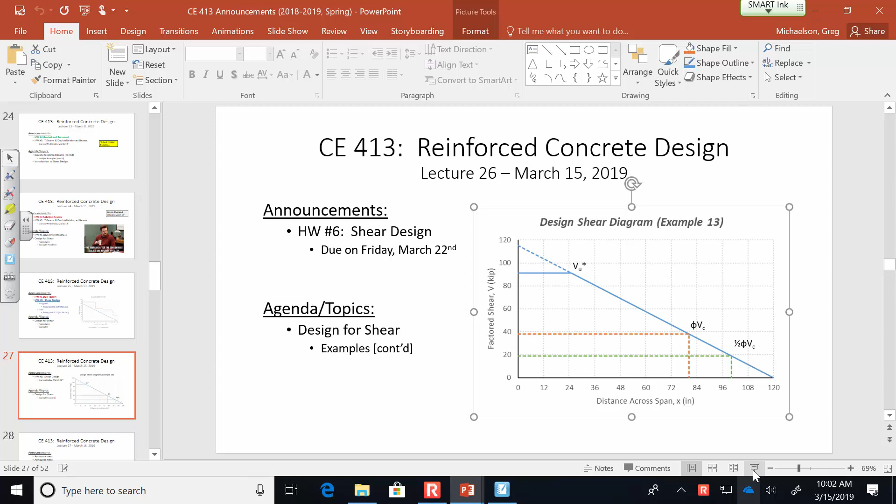Oh, goodness. All right, let's get started. So I don't really have a whole lot in the way of major announcements.

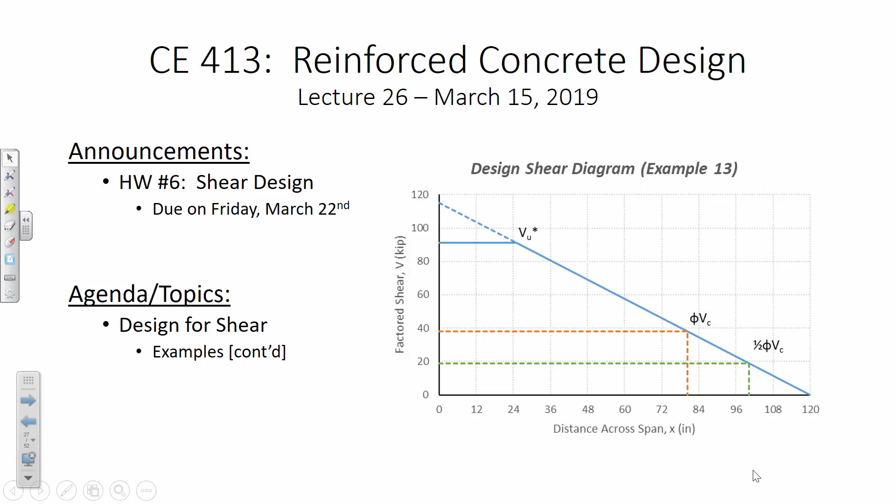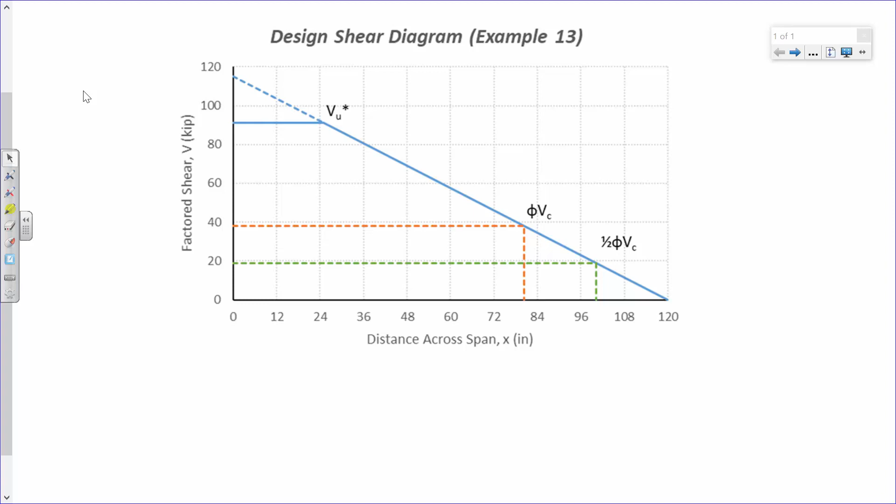Now what we had arranged, or what we had come up with, was a few other things. Let me write those out. So here's the image, I'm going to drag this over, and then there were a few other things we should add on top of this.

First off, we know that phi VC was something like 37.95 kips, I think that was one of our values. And then we had 2 equations that we had come up with. Our shear equation was 115 kips minus 11.5 kips per foot times x. And then we came up with x equals 115 kips minus VU, over 11.5 kips per foot. Those were the 2 expressions we came up with for this problem.

The first is given an x value, what is the value on the shear diagram? And the other is vice versa: given a shear value, what is the location on the x diagram?

Okay, and then we've got our VU star. VU star, let me point that value out. This was 91.04 kips. This is 37.95, and this is 18.97. This x value was 80.4 inches, this was 100.2. So is everybody okay with determining that?

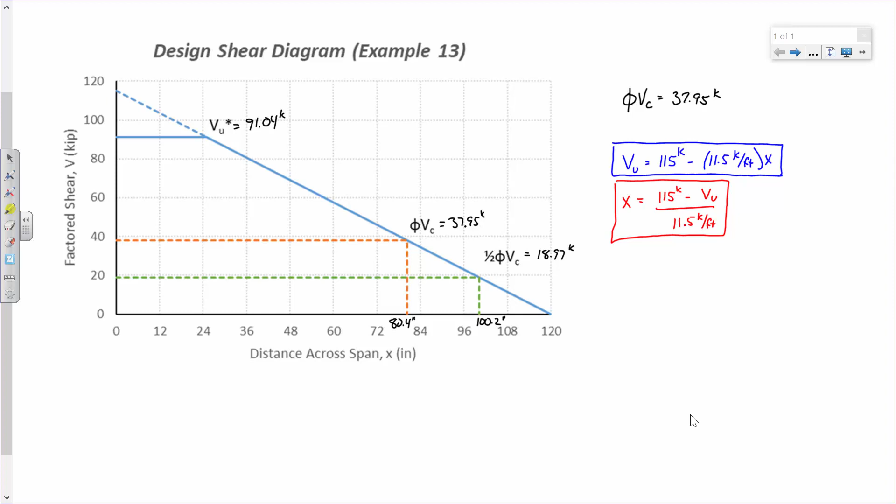Okay, all right, so let's begin our design. Let's actually get into this, because the design process is not that difficult once you have the shear diagram figured out, but laying it out takes a little bit of thought.

The big thing that we ended with in this example is one thing I need to state: we are going to be placing stirrups from x equals 0 inches to x equals 100.2 inches. That was the final observation we made. Remember, from x equals 0 to x equals 80.4 is where we have to have them for strength requirements. Between 80.4 and 100.2 is where the concrete takes over, but we just have to place S max. Anything past that is where we don't need stirrups at all.

Sound good? Now, to start my design, what I'm going to do is use VU star. Based on VU star and based on what we're getting out of our concrete, we're going to determine what our required stirrup spacing would be at the very beginning. So step 2 is to determine our starting S value.

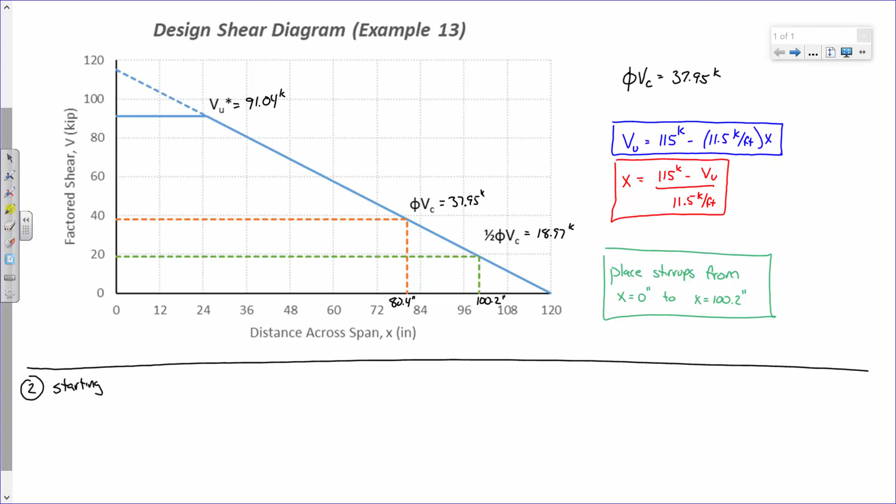Okay, so our starting S value is computed by saying phi times AV FYTD over VU star minus phi VC. Everybody's going to write that down, and I want to explain why we're using this expression the way that we're using it. So go ahead and write that down, and I will explain what's going on.

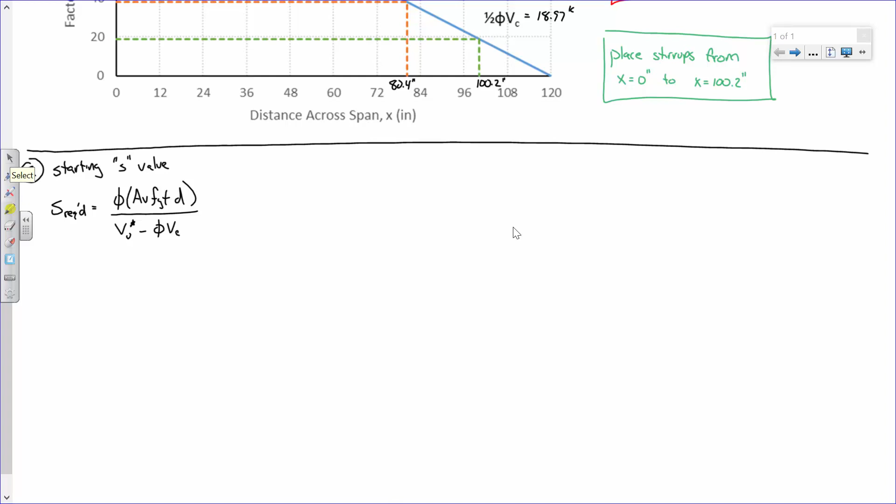Everybody good? Okay, so what I'm doing here is I'm basically looking at this: I have phi Vn has to be greater than or equal to Vu, and so we compute phi Vn by adding up phi Vc and phi Vs. I know what phi Vc is, that's 37.95 kips or what have you, and so I need to figure out what phi Vs is. Well, phi Vs is phi times this quantity, it's AV Fy d over S. So really what I'm after is I'm solving for S — what stirrup spacing do I need to provide in order to ensure that my beam has adequate capacity?

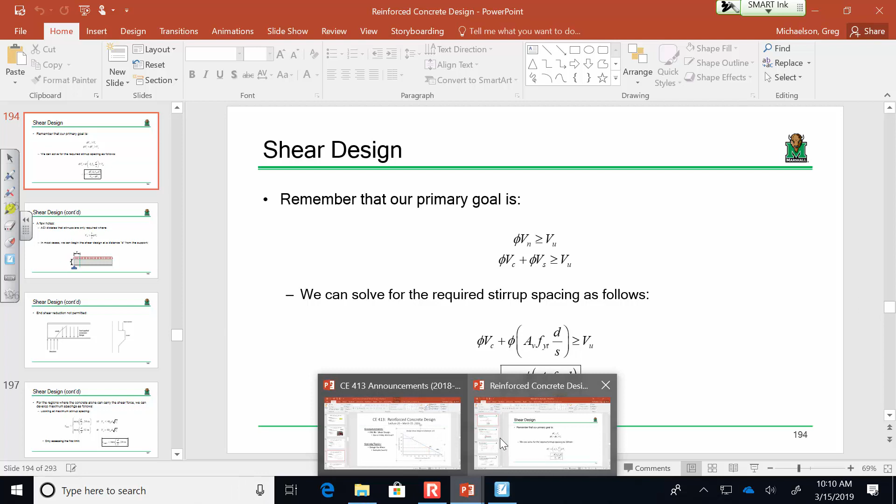Now, what I'm going to do for the purposes of this design is I'm going to start my shear design using the shear at x equals d. So I'm starting this design at VU star, that's why we have VU star there. And so that equation is exactly what it was before, just plugging in VU star. So let's plug and chug this out.

So this is a big fraction up top: 0.75, 0.22 inches squared, 60 KSI. What was D for this problem? 25 inches. And then VU star — I'm not using the shear at the support, I'm using the shear D away from the support. So I'm using 91.04 kips, and I'm subtracting phi VC, and phi VC was 38.97 kips.

Did I do something wrong? 37.95 — why did I think 38.97? I don't know where I got that. It's 37.95 kips. Okay, so what does this come out to be?

4.66 inches. Do I have a second on that? So what this is saying is that if I want to provide adequate shear capacity in this region right here, and we're assuming constant shear, I need to utilize a stirrup spacing of 4.66 inches, right?

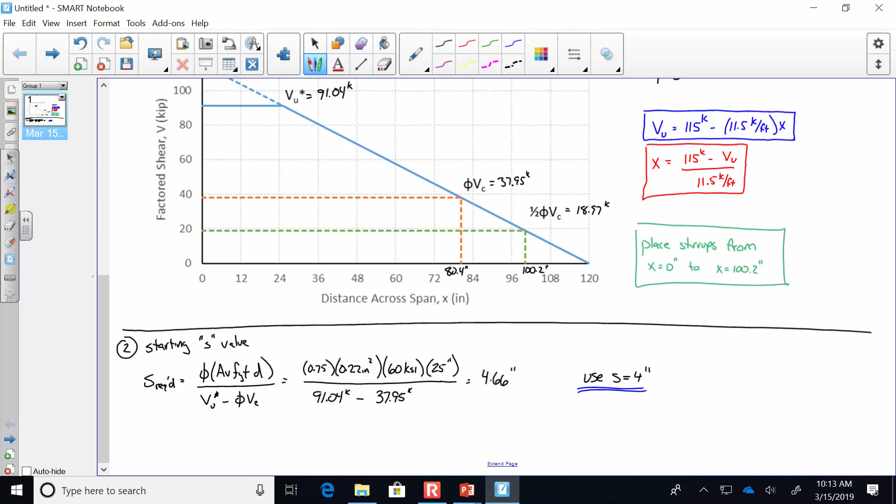Now, let me explain how this layout will work. What I'm going to do is I'm going to generate a design, okay? We could stop right now and produce a design, and I'm going to show you how to do that right now. We're going to produce a design, and then we're going to improve upon it, okay? So let's look at design number 1.

Okay, now let me explain how stirrup spacing works. So we're going to use a stirrup spacing of S equals 4 inches throughout the beam. However, when you place your first stirrup, typically what you try and do — a very common value for your first stirrup is to either use half that value or to use something like 2 inches. I'll show you why here in a second.

So I'm going to write out verbally what we're going to do. We're going to place the first stirrup at X equals 2 inches, okay? Then what we're going to do is we're going to use 4-inch spacing.

Until where? Now I'm keeping this design very, very simple, really easy. So I'm going to use 4-inch spacing until X equals 100.2 inches. Why am I stopping it at 100.2 inches? Because past 100.2 inches, the concrete can take over and I don't need stirrups at all. Does that make sense?

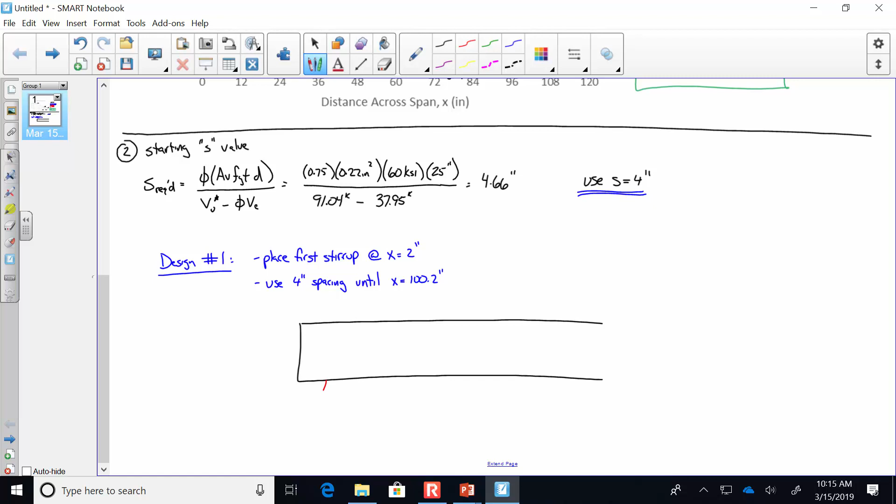So imagine, here's the beam, and let's say that the support is right here, okay? So here, that's X equals 0, right?

Typically the idea is we'll place that first stirrup 2 inches away and then 4, 4, 4, because you could theoretically have a stirrup behind there, and so you would know that that stirrup spacing crossed or straddled the support, which is why we go with usually half or 2 inches or something like that. It's very common. Is everybody okay with that?

Okay, so here's what we're going to do. We're going to place our first stirrup at X equals 2 inches, so 2 inches away. Then we're going to have a stirrup 4 inches away, 4 inches away, 4 inches away, etc.

Okay, let me lay that out. I'm going to have one stirrup spaced at 2 inches, so that's going to be 2 inches out. Then I'm going to do my remaining stirrup spacing at 4 inches. How many increments am I going to need to get to this? Think about how that math works.

So if I do 1 at 2 inches, that's 2. Then this would be 6, this would be 10, this would be 14. Everybody see how this is going? What did somebody say?

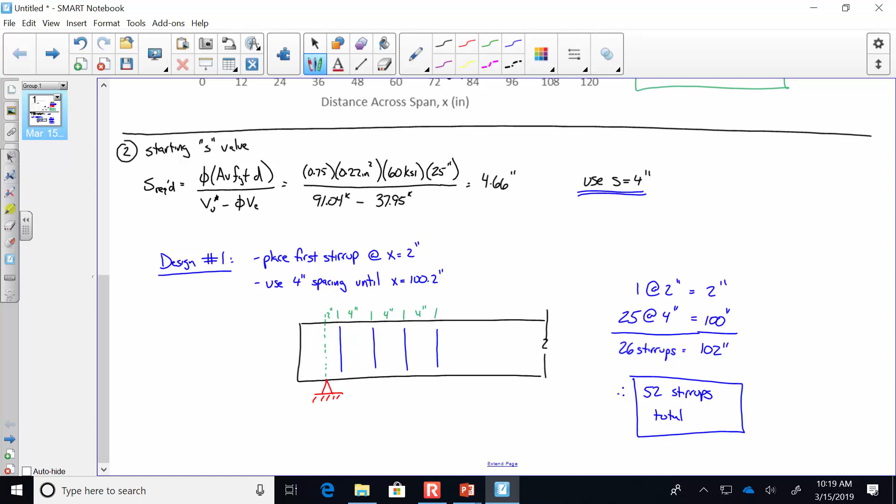Okay, now that was us crawling. Now let's try walking, okay? And what do I mean by walking? I'm using baby terminology, you probably see why. What do we need to do now? What was a point somebody raised earlier?

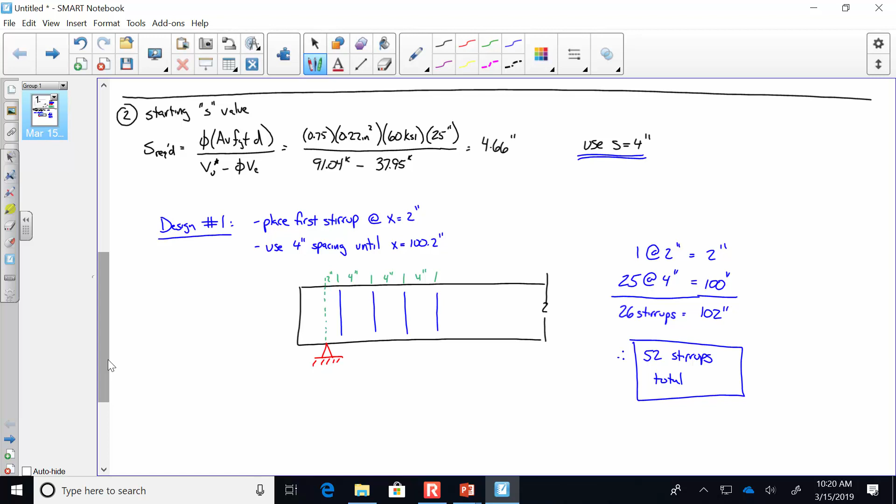Well, that's true, but what about that center section? That center section, we could use S max, right? Okay, so before we do that, I have a little bit more of an elegant way of handling that. The first thing we probably need to do is figure out what S max is. Let's go off on the side here, and let's determine S max.

Okay, let's determine S max. The way we do that is we have two different quantities that we're going to compute. Before I do that...

Off to the side here, what is 0.75 times the square root of FC prime? You'll see why I'm doing this. Just bear with me. Okay, I'll just put that off to the side for now.

So we have S max 1, which is the minimum of D over 2, or 24 inches. So that's the minimum of, what is D? 25. 25 over 2, or 24 inches. What is 25 over 2? 12 and a half.

That's S max 1. So there are two S max computations that we perform: one because the code has a limit on maximum spacing, and the other because the code has a limit on minimum reinforcement. We just rearrange it and solve for S.

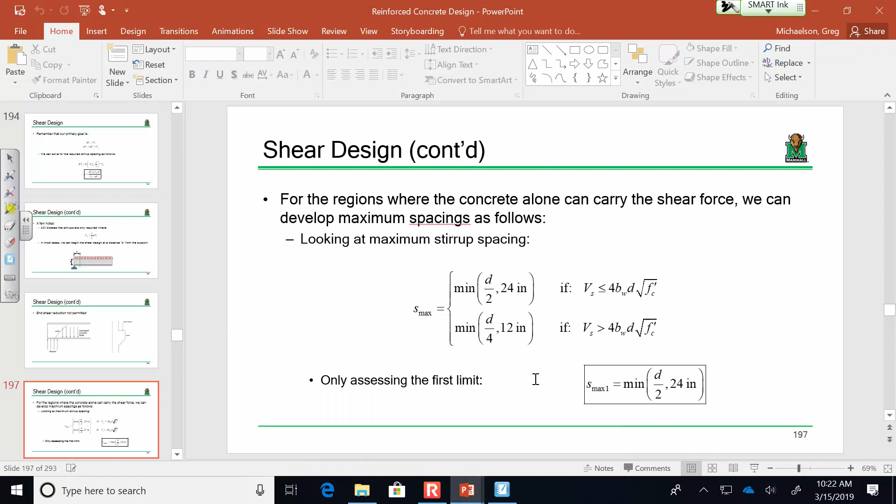Now S max 2 is computed by taking AV times FYT over BW times, well, if you go to the spec, it's BW times the maximum of either 0.75 root FC prime or 50 PSI. So which is the maximum? 50. So you see why I computed this off to the side, because we were going to need it anyway.

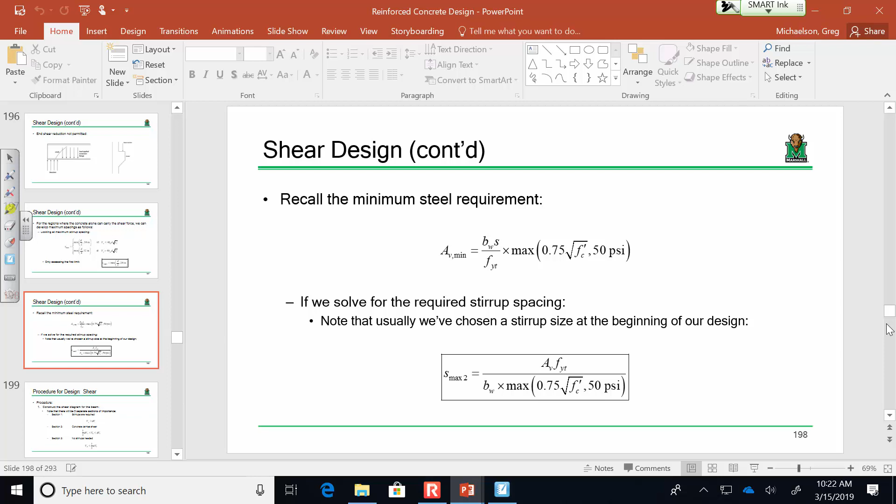So the formula is the maximum of 0.75 root FC prime or 50 PSI. Well, we know that's 50 because we computed that over here. So we have 0.22, 60...

BW, what's the width of this beam? I don't remember, was it 14 inches? 16 inches. And then this is 50 PSI.

Do we have a problem here? There we go, making sure everybody's awake on this Friday. Got to turn that into 60,000. How, was it like, oh I forgot about that? You're like, Dr. Mike, it's Friday, let's just go, we can't handle the jokes. Just wait till senior design. All right, so what does this come out to be? Come on, it's concrete design, I'm trying to crack you up. Come on. That was a good one. What's that? What'd you get? Have I not used that one yet? Concrete design, I'm trying to crack you up.

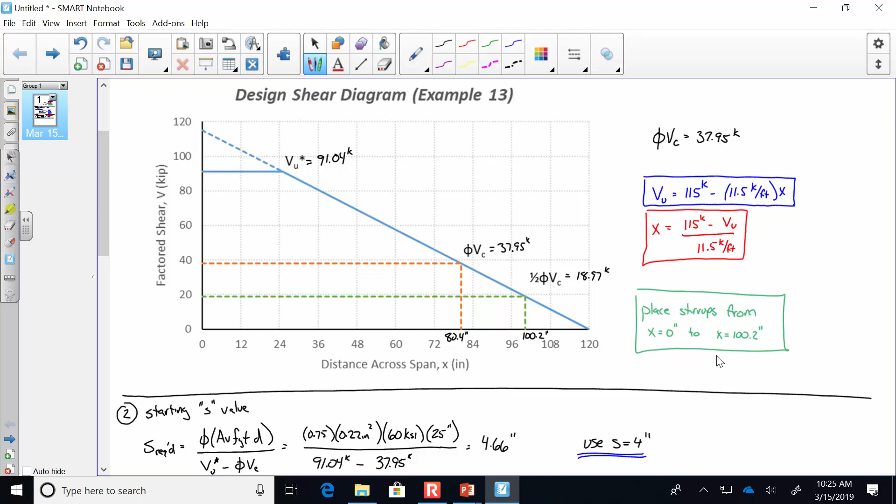If I have an S equals 12 inches, I can compute a VS, a VN, a phi VN. I can compute the capacity, and then I can figure out where that capacity occurs on the shear diagram, and it'll tell me when I can start using S equals 12 inches. So that's what I'm going to do. So step 4 is determine when we can start using that.

So determine the range for S equals 12 inches. Okay, so here's how that works. So VS is AV, FYT, D over S, so that's 0.22, 60, 25 over 12. What does that come out to be?

27.5 kips. Second on that? Okay, next, what I'm going to do is compute phi VN. So phi VN is going to be phi VC plus phi VS. So what's phi VC?

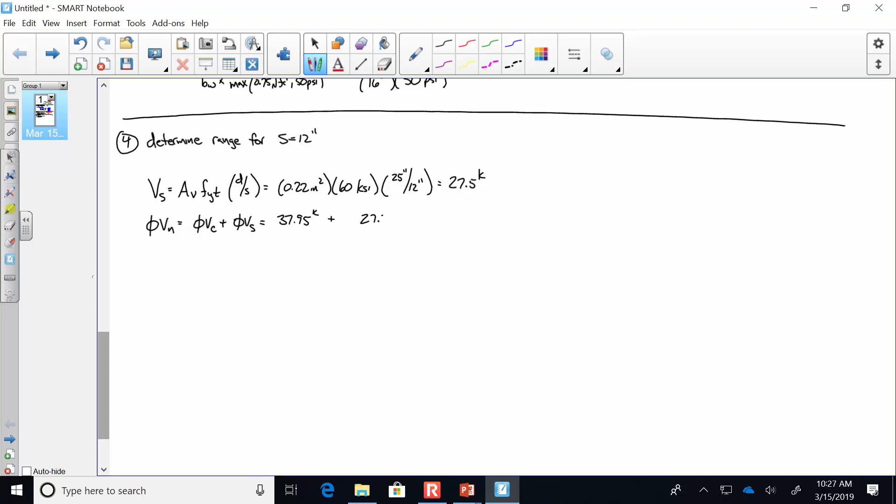37.95 kips, plus, you do not just add 27.5, that's wrong. You add 27.5 times 0.75, so don't forget the phi here. Make sure you're adding up apples to apples, so you have a phi VC and a phi VS incorporated. So what does this come out to be?

58.58. Okay, all right. Let me scroll back up to the shear diagram because I really want this to make sense. What'd you say? 58.58. So that's about right there. Would you agree with that?

Would you agree that I can probably start using S equals 12 inches about there? Think how this works. If I use S equals 12 inches, I get a capacity of 58.58 kips. So instead of starting to use S equals 12 right here, I'm going to start to use it right here. So I'll use 4-inch spacing up until here, 12-inch spacing up until here, and then I'm good.

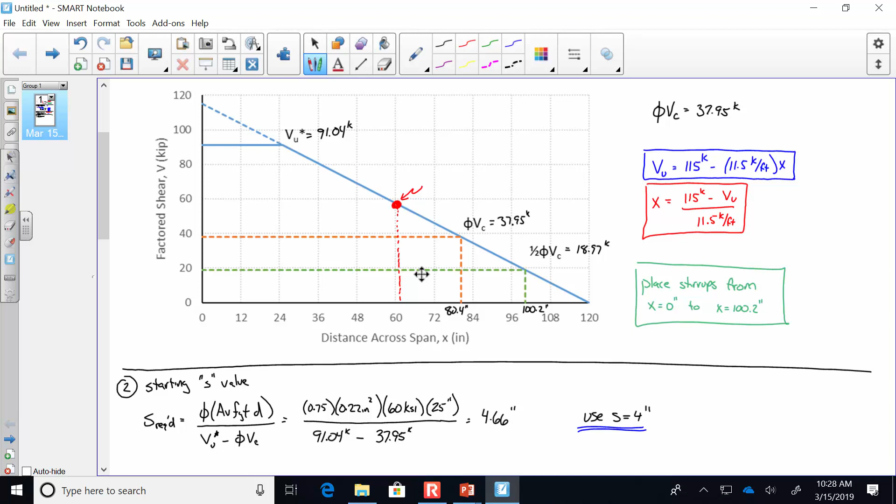Now, how do I determine exactly where that is? I use that equation, and for this VU, what do I plug in? The 58.58 kips. So let's see what that is. X at phi VN is 115 kips minus phi VN over 11.5 kips per foot. So that's 115 kips minus 58.58 over 11.5 kips per foot. And so what does that come out to be?

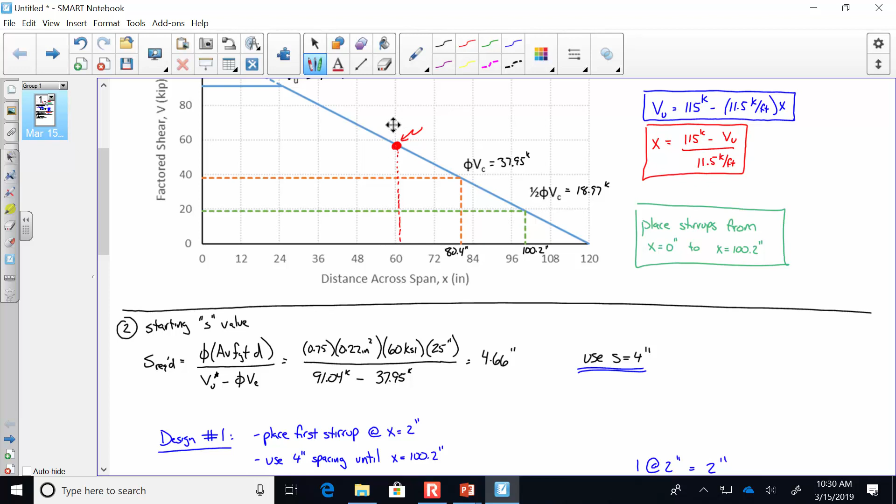.91 what? Feet. So in inches, that's what? .87 inches. So was that about 59 inches? What did I draw on the graph? A little over 60. Well, I'm not really good at drawing a straight line, but it's about that spot, right? So I drew that down to like 60 when actually it's probably a little over there. I can't draw, so... but I can make stupid puns.

Okay, so here's what this means. Let's try this again. So now this is going to be design number 2. Now let's write it out verbally so that we understand what we're doing, and let's see if we can do some mental math to try and figure this out. So what we're going to do is we're going to place our first stirrup at X equals 2 inches, right?

Now, right now we have 4 inches, and what else? We have 4 inches and 12 inches, right? So here's what I propose. We're going to use 4-inch spacing until where? When are we going to stop using 4-inch spacing? There you go, the X equals 58.87 inches. And then once we hit that point, then we're going to use 12-inch spacing until X equals 100.2. Does that make sense? Yes.

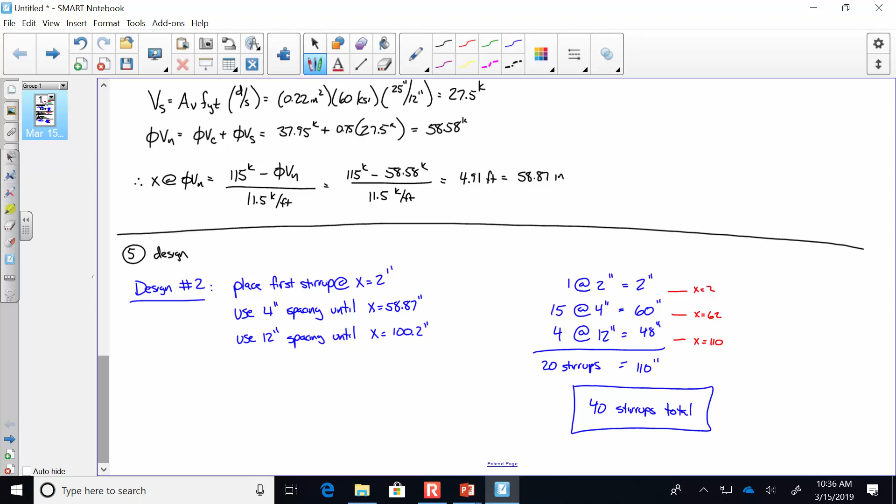So if I'm trying to improve this design, I can probably only use values in between, something like maybe 6 inches, 8 inches, 10 inches, 12 inches, somewhere in between. Fair point? Okay, so let me be absolutely clear. This is a totally feasible design. Totally feasible design. Oh, goodness. Let me show you one more feasible design.

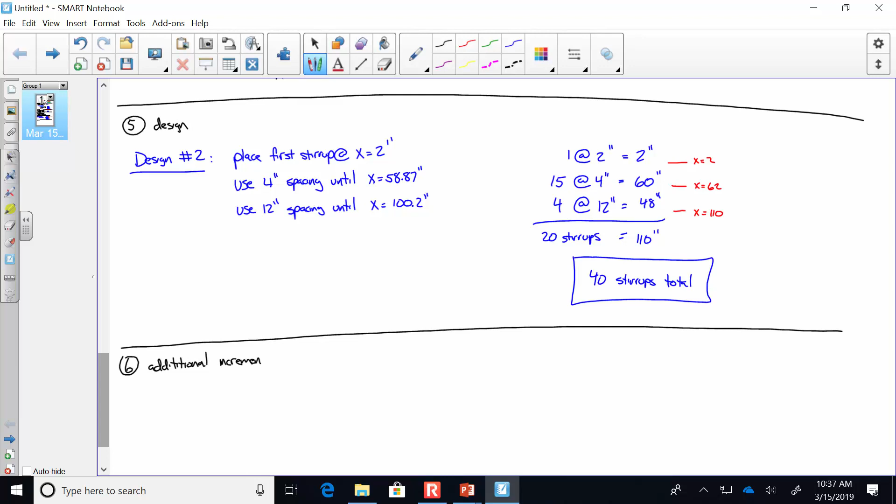I'm going to show you how I'm going to go about that. 6. Additional increments. Okay, so I'm going to show you something.

So we have 4 and 12. I'm going to say that we can probably do stuff in between, maybe 6, maybe 8, maybe 10, something like that. Now I could use a stirrup spacing of like 7 inches or 9 inches or something like that. But honestly, I don't really think that the multiplication is going to work very well. I'm trying to do this in my head, and I'm trying to explain this just so that everybody kind of understands what's going on from a conceptual standpoint.

Now let me look at this lower row on the table so that you all understand. What did we do with this S equals 12 inches earlier? We said if you have S equals 12, you can compute VS, and that ended up being 27.5, right? Then we said, well, if you have VS, you can compute phi VN, and that ended up being, what, 58.58? Right? And what was X for that? It was...

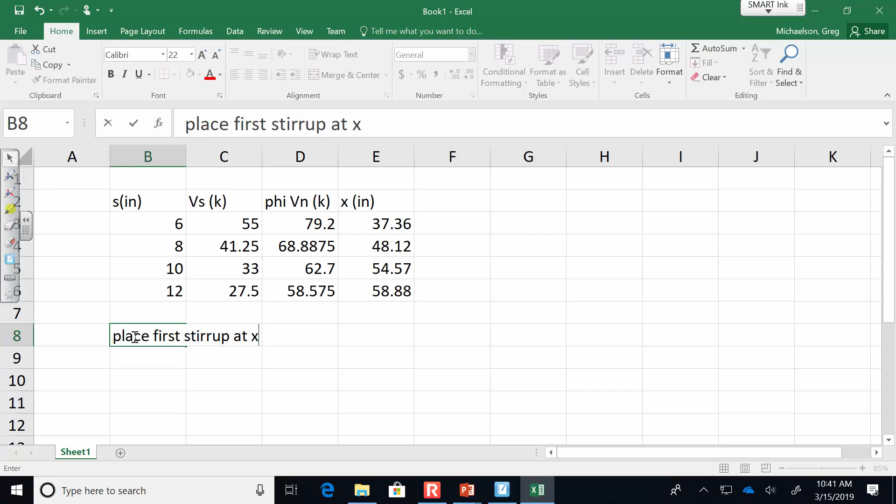We place our first stirrup at X equals 2 inches. For the sake of discussion, let's say we'll use S equals 4 inches until we reach X is 37.36. Then we're going to use S equals 6 inches until we reach X is 58.89. Then we're going to use S equals 12 inches until we reach 100.2. So what I'm doing is just adding another increment in between.

I'm not trying to use 7 increments. For our last design we had 2, 4, and 12. What if we did 2, 4, 6, and 12? So we'd place our first stirrup at 2 inches, use 4-inch spacing until we hit here, then that would allow us to use 6-inch spacing until we went there, and then we use 12-inch spacing throughout. Does everybody see kind of how I did that?

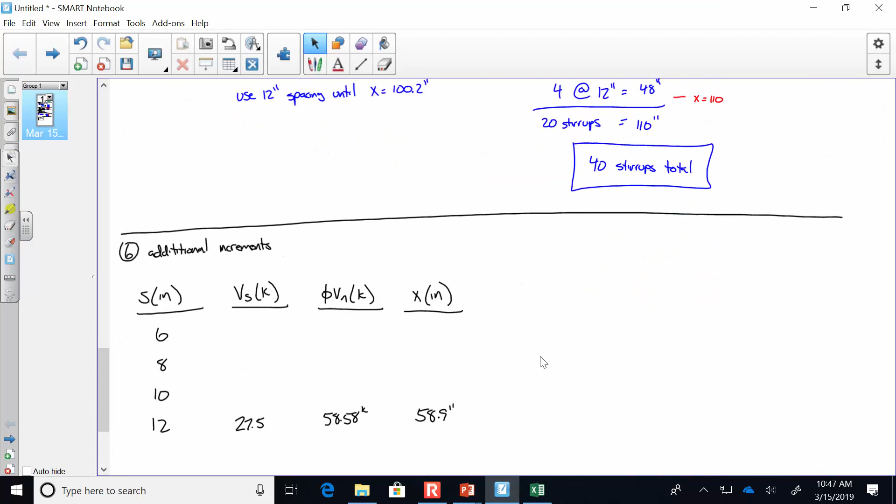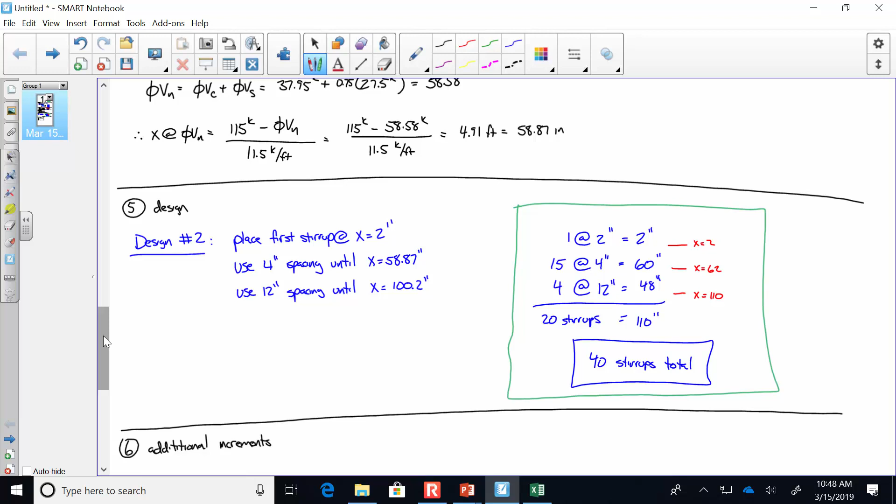So if you're wondering what the answer is, this is your answer, the design. For this problem, we came up with really two answers that I would say would be acceptable. One of those is: we put one stirrup here, 15 stirrups at this spacing, and 4 stirrups at this spacing. That is an answer right there. Another answer is 1 at 2 inches, 9 at 4 inches, 4 at 6 inches, and 4 at 12 inches. That is an answer as well. I'm sure you're like, okay, I get what you're talking about, but what's the actual answer? This is the answer.

So you can see I've got two different designs. This design is a little more intricate, but ultimately uses less steel. Again, I think it's a trade-off. For this problem, I think using 3 increments is fine. If I was designing building beams, I probably wouldn't use more than that practically. Bridge girders, that's a different story - you could very easily throw in a few other increments if you can shave some shear reinforcement. What do you think?

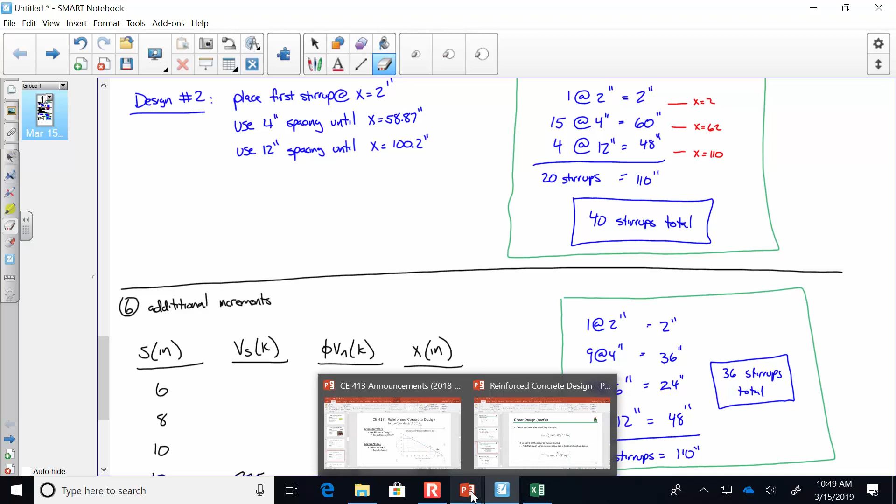So what we're going to do on Monday, just so you're aware - what we did just now was this example with a distributed load. What we're going to do on Monday is, what if we have point loads? Because what do point loads do to your shear diagram? Pop quiz, from CE 312. It changes the shear diagram. Man, give you a blue ribbon.

Say it again? Yeah, because remember you go up and then boo, right? Remember you're drawing the shear diagram, and it says go down. Remember that? Well, that sudden drop in your shear diagram will change how you lay out the stirrups. But really another thing that can happen is those equations we were using to solve for x - remember that? Well, you can actually get some wonky answers, and if you don't refer back to the shear diagram, you can get x's that are negative. You go, what? It's because you're not looking at the shear diagram as a whole.

So we'll tackle this on Monday. I'll give you a little bit of a heads up - this is our last example on shear, okay? We're going to tackle this on Monday. To be honest, we probably won't finish it, but I'll do my best. I'm not going to rush through this because this is kind of important. We're going to go through this on Monday. We'll probably have a little bit on Wednesday, and whenever we finish this example, we're done until we come back from spring break.